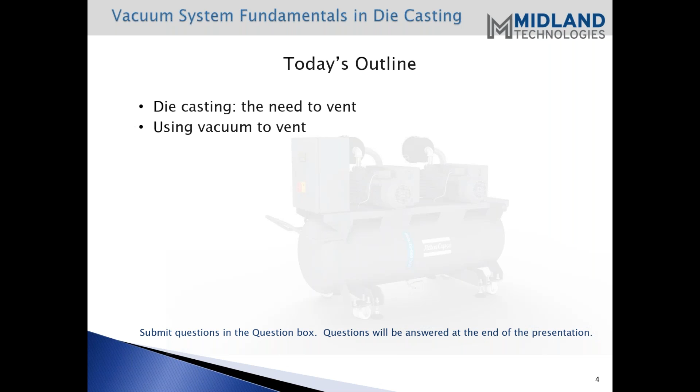So today's outline: we'll briefly go over some basics with die casting and the need to vent in die casting, and then also using vacuum to vent. We'll look at the fundamentals of a vacuum system, sizing the vacuum system, and the process during die casting and how the vacuum works. We'll be covering types of vacuum pumps, installation, monitoring, maintenance, and troubleshooting at the end. If you have any questions, submit them in the question box or comment box, and we'll answer them at the end of the presentation.

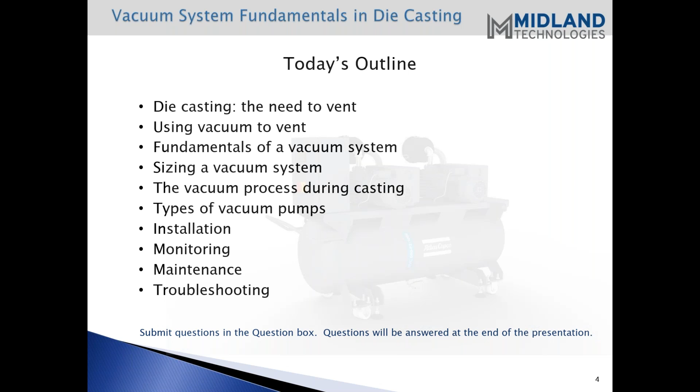Porosity is present in all die castings. If you've dealt with die castings at all, you know the air present in the casting - we term it porosity - and it's detrimental to the part. That's usually present in the shot sleeve, in the case of cold chamber, the runner's gate, and cavities, along with gases formed that end up in the casting when we shoot metal into the part. There's also release agent and/or tip lube in the cavity, and if it's not totally removed, we end up with porosity caused by that. So that requires us to have some means of evacuating that cavity, which is what we're going to discuss today.

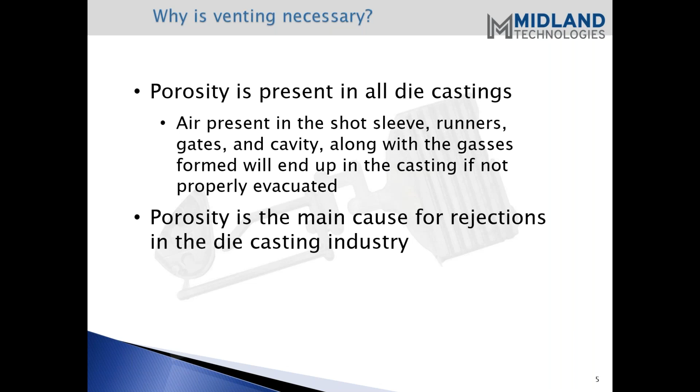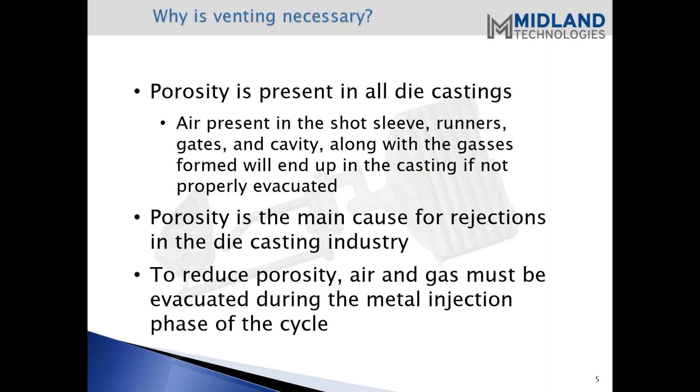Porosity is the main cause for rejection in die casting - I think everyone knows that. So we want to reduce porosity. The air and gas must be evacuated during the metal injection phase of the cycle, because we can't do it after that. We've talked about this in previous webinars - you're always going to have some porosity, but the key is to minimize it as much as possible. So why use vacuum?

We want this in cases where we have requirements of low porosity levels, for parts that are sensitive pressure tight vessels and structural members. Along with that is cosmetic features, and if we evacuate and get the metal in there quickly with reduced resistance, it also helps in producing thin wall castings.

It can assist with poor fill castings. We know thin walls, ribs, sharp corners, and standing posts pose their problems, and this alleviates some of those problems in those areas. High casting yields - we want to accomplish that, since downtime in the press is critical. So yield is everything in my mind.

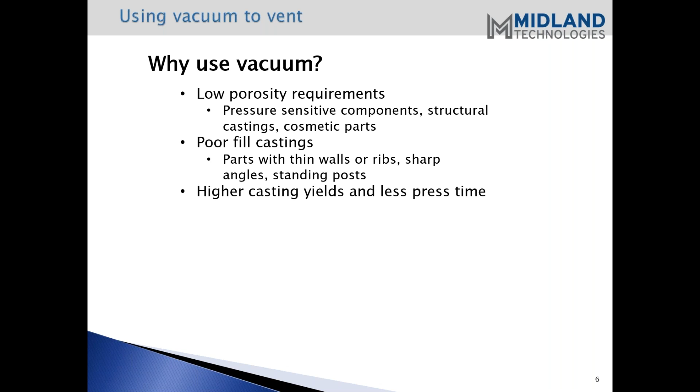You can make a lot of castings quickly, and I've seen that done over the years, but you probably want to make good ones. Yield is the key.

We've got here a slide with some pictures of Midland vacuum valveless vacuum blocks. No moving parts, as we note, and they're relatively easy to maintain if you design the system and hook them up properly installation-wise. The other advantage we have is reclaiming the metal. With conventional vents, we're unable to reclaim that thin flash. With a vacuum system, we can claim the majority of the metal.

And I think we'll be kind of emphasizing using the valveless vacuum block in the presentation, as we'll see.

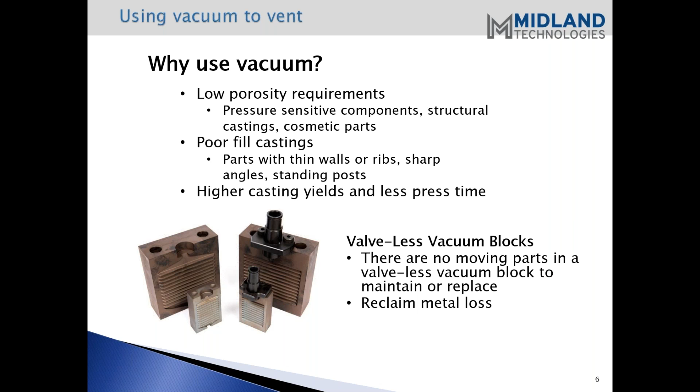So fundamentals of vacuum. The first thing we'd like to cover is the vacuum unit. Everybody's probably familiar with inches of mercury, a very common way to measure vacuum, originally developed by Evangelista Torricelli back in 1643 during his work on the original barometer.

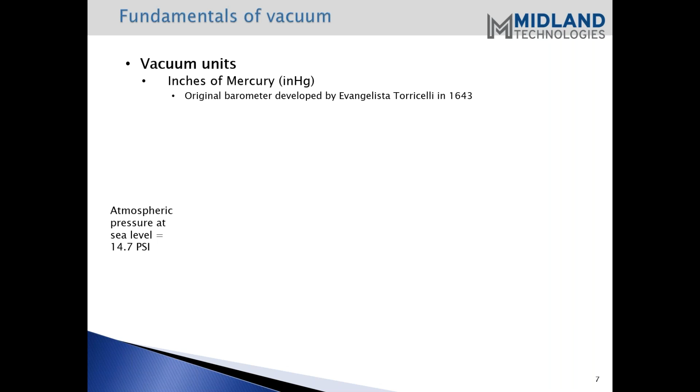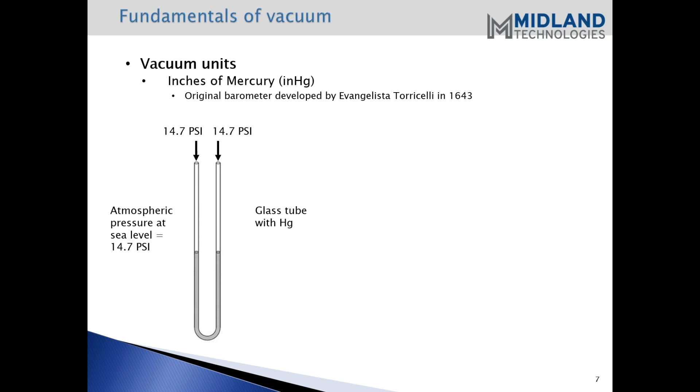If we took one end and attached a vacuum pump to it, removing all the air on that one end, with the 14.7 psi coming down on the opposite end, the mercury will start to rise, and it will rise to a maximum level of 29.92 inches. That's where that number comes from - the maximum value you can have for vacuum, and that's true throughout the whole world. You can't pull any more vacuum.

It's unlike compressed air, where you have a compressor that can build up more air as you go through. With vacuum, you reach 29.92 inches and that is it. So that's what we consider the maximum vacuum level - some people refer to it as perfect vacuum.

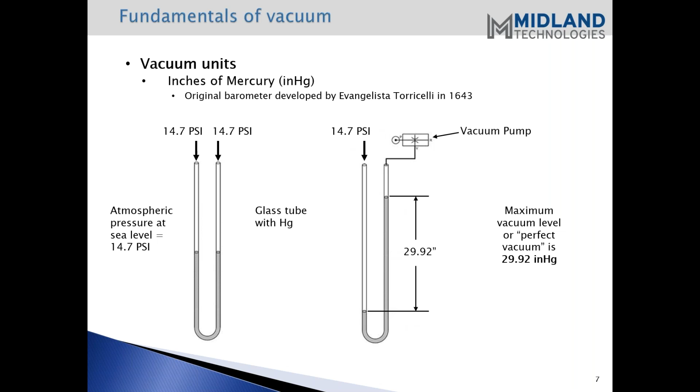The methods of measuring inches of mercury - a common one is the mercury gauge. Here on this slide it shows a standard gauge where 0 is atmospheric pressure, there's no vacuum, and 29.92 inches of mercury is your maximum vacuum.

There's also what they call mercury absolute, which is the inverse of the gauge pressure, whereas 29.92 inches of mercury is atmospheric pressure, and 0 inches is the maximum vacuum. You don't see many absolute gauges out there, but it is used in theoretical work, formulas and such.

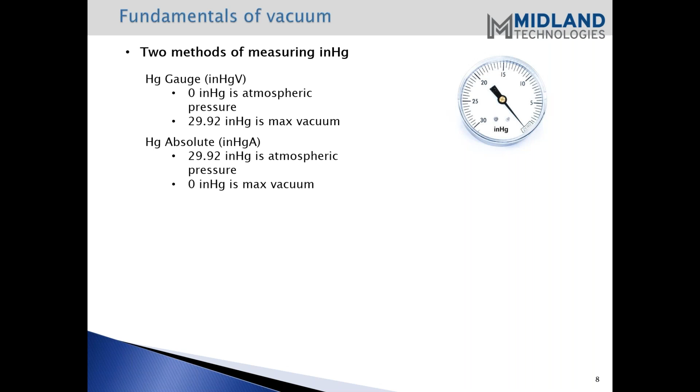Some of the other popular units are also absolute. First is torr, named for Torricelli, which is basically 1 millimeter of mercury. So if you have 29.92 inches of mercury and multiply it by the conversion factor of 25.4, 760 torr is the atmospheric pressure, and this gauge here shows that.

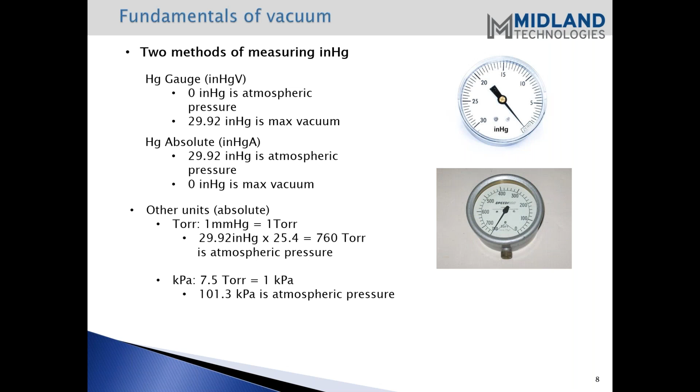So here's a gauge that does use torr for absolute pressure, and 760 is basically no vacuum at this point. Another popular unit is kilopascal, and 101.3 kilopascal is atmospheric pressure.

So what is the vacuum level needed for die casting? Very good question - that's the top question. It's very dependent on the volume of the casting and the speed of injection, and it can vary from one machine to another, one plant to another. What we have found is somewhere between 18 inches of mercury to 25 inches of mercury, you get a good casting from that.

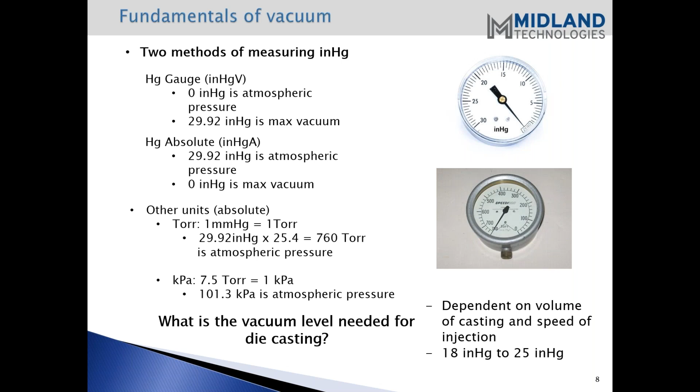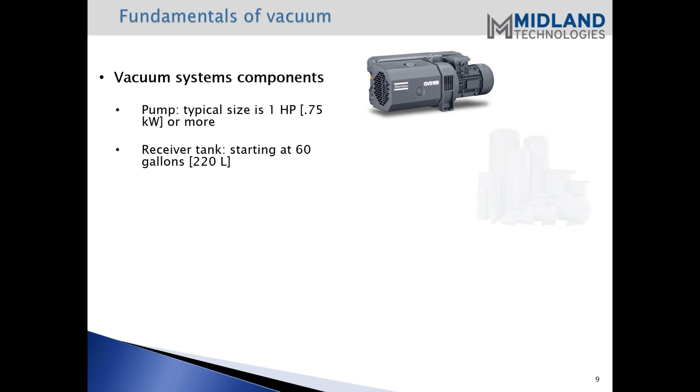So vacuum system components - a vacuum system consists of a pump, typically starting about 1 horsepower, or larger pumps as well, and a receiver tank starting around 60 gallons, which is what's typically seen in the industry. Here you see in the little picture horizontal tanks, and then you also have vertical tanks - each one's just fine.

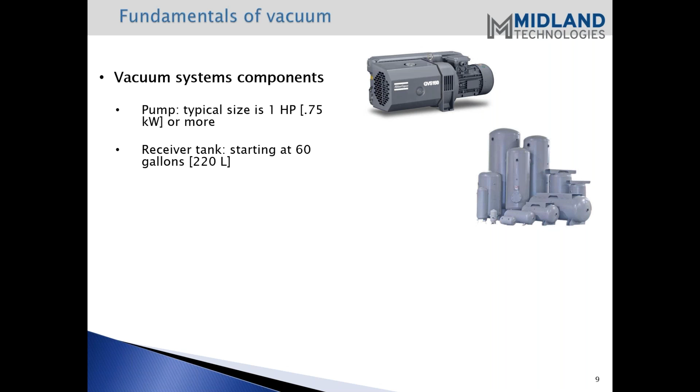So if you have a valve open or a leak or something, you don't want to do that. That'll kind of heat up the pump. But a standard closed system that's open and closed at certain times works just fine with the manual system. Have it on all day.

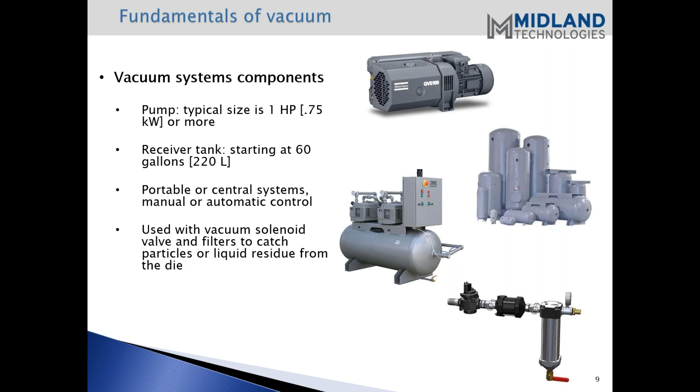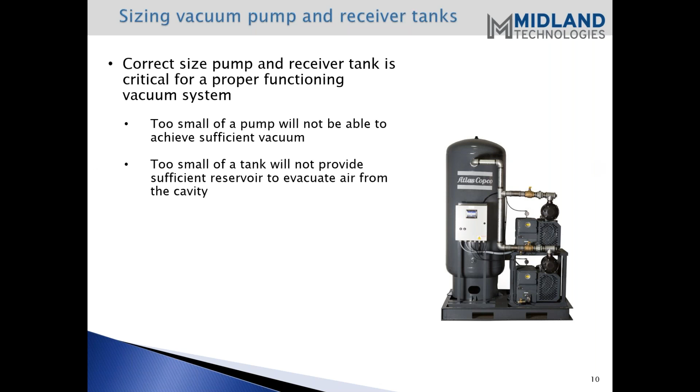So the correct size pump and receiver tank is critical for proper functioning. Too small of a pump, you won't be able to achieve sufficient vacuum. Too small of a receiver, you won't have sufficient area to evacuate the air from the cavity.

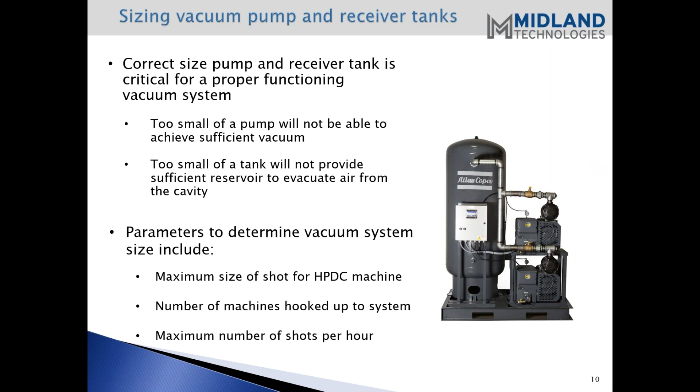So the parameters to determine your vacuum system size include the maximum size of the shot for your die-cast machine, the number of machines you're going to hook up to the system, and the maximum number of shots per hour. So what you want to do is design it for the maximum situation scenario that you might have, so any smaller items, a smaller situation will work fine.

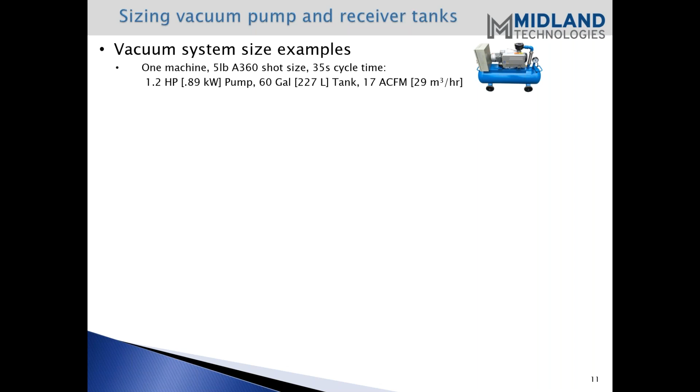So some size examples here. Let's say you have one machine, 5-pound shot size, 35-second cycle time. A 1.2 horsepower, 60-gallon tank would be sufficient with a 17 actual CFM. Now on different manufacturers, it might vary - it might be 1 horsepower, it might be 1.5 - but that would be sufficient size.

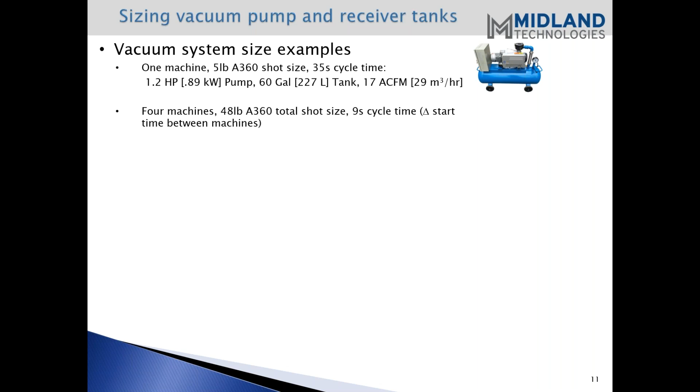Let's say you have a different scenario - 4 machines with 48 pounds total shot size and a 9-second cycle time, basically the delta start time between machines. In that case, a 3 horsepower, 120-gallon tank would be sufficient as well. And these numbers also include a safety factor. You want to make sure that you have a good safety factor in your calculations, so you have a large enough system.

The one thing too is that having a large system is just fine. So if you have a large system, but the next setup might be a small shot size and such, that doesn't matter. You want to make sure you have a large enough system for the maximum shot size and cycle time in your situation. Having too small of a pump, that can be an issue, and that's what you want to try to avoid.

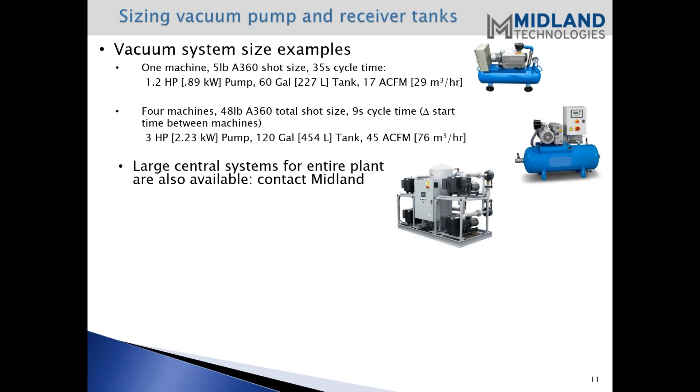So large central systems are available, of course, and if you have a situation like that for your application, you can contact Midland, and we can help you with those cases. So if you're not sure what size you need, we also have a vacuum pump sizing form on our website, and you can click on that form, fill it out, send it to us, and we'll help you determine the right size again for your application.

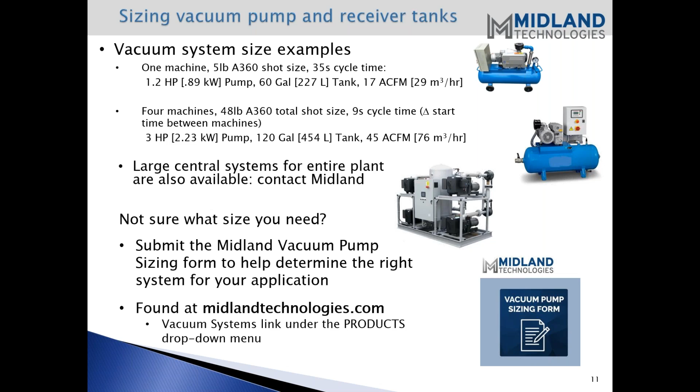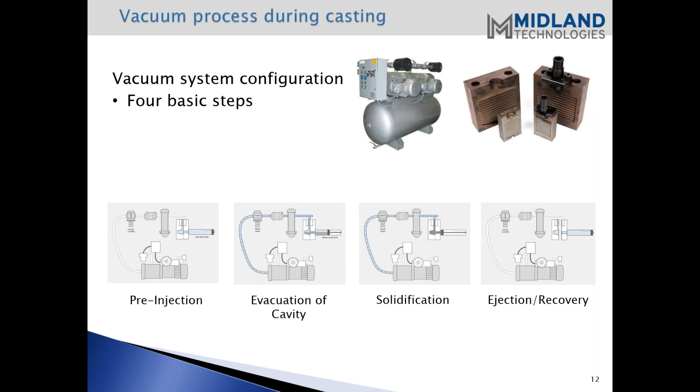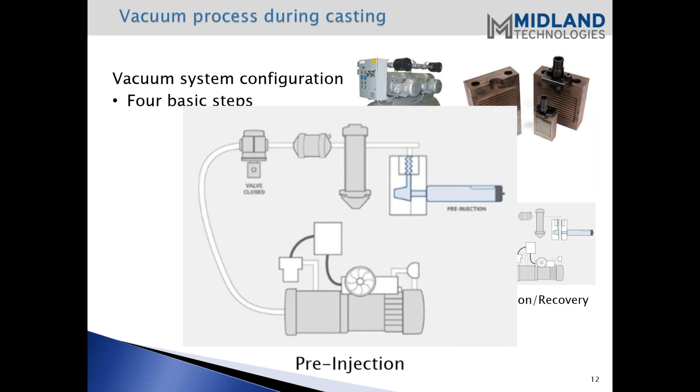So the vacuum process during casting - there are basically 4 basic steps. Here this diagram shows the pump system with the solenoid valve, media filter, knockdown filter, and you see a die here with the sleeve next to it, and the plunger in that sleeve is before the pour hole. So this is before metal is introduced.

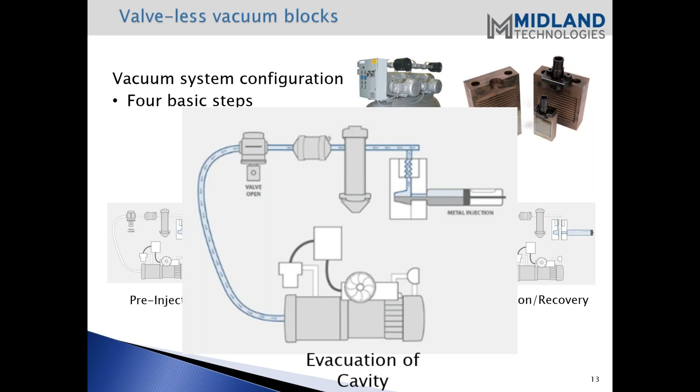Once metal is poured in and the plunger goes past the pour hole, that's when vacuum can be turned on. And the valve is open and it's drawing air as the die is being filled.

Once the die is filled and you pass the fast shot speed, you start to get into solidification. At that point, the vacuum with a valveless vacuum block can still be turned on. You don't have to shut it off. There's no metal that's triggering the valve to shut the vacuum off. Vacuum can be stayed on all the way through. In fact, it can be stayed on until you open up the die. And that's kind of a nice advantage of having that. It is an advantage. Yep.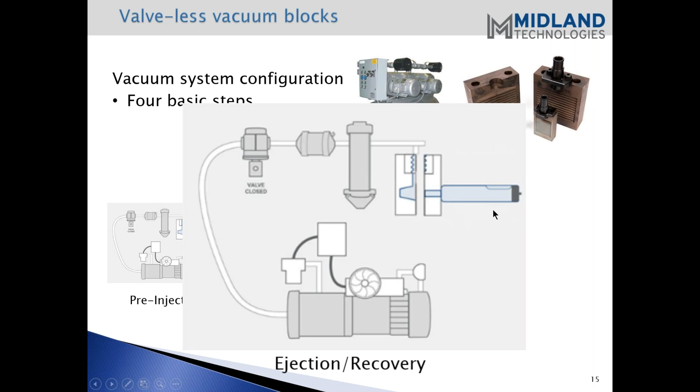All right, perfect. So let's talk a little bit about vacuum pumps. There are many different types of vacuum pumps manufactured. And obviously, as you guys mentioned, there's different levels of vacuum, and the type of pump will usually depend on the level of vacuum.

So there are rough vacuum pumps, there are high vacuum pumps, there are ultra high vacuum pumps, and the technologies are obviously different. For casting applications, the levels of vacuum in which the application usually takes place are what we would consider the rough vacuum range, which is anywhere in between atmosphere and more than 1 torr.

So the rough vacuum range has a big advantage in that it requires some of the less complex types of technologies out there, which means that there are pumps that do not require very special materials or very special machining and manufacturing processes.

So what I want to talk a little bit about in the next couple of slides is at least the most common types of machines that are used for casting processes and how they work, what kind of advantages and what kind of disadvantages they have.

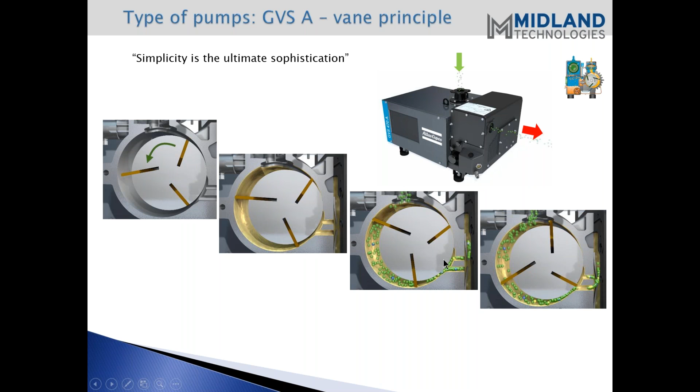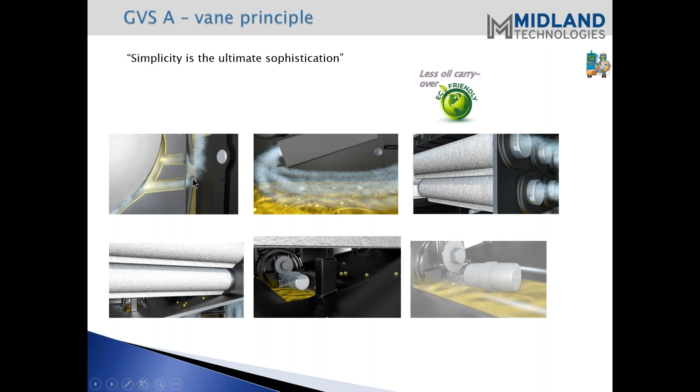Once you compress, it goes over to the exhaust port where there's a valve that prevents backstreaming. Then we go to the next part of the process, and that exhausted air and gases that are coming from the process at atmospheric pressure, a little bit higher than atmospheric pressure, they open the exhaust valve, and then they go through a little bit of a tortuous path in order for you to separate the oil from the gases and recover the oil that's being used to seal the pump.

So that mixture of oil and exhaust gases will go through a few baffles. It will go back to the oil reservoir, and then it will go through exhaust filters that look like paint rollers. These exhaust filters operate as coalescing filters, so all the small droplets of oil start accumulating, they coalesce, they drop down, and they accumulate in a small reservoir that has a float valve inside of the pump.

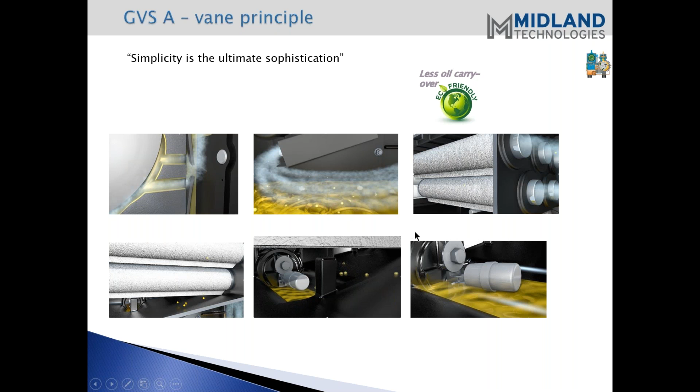Once that float valve is actuated, because there's enough oil accumulating there, it would just open and allow this oil to go back into the oil reservoir. So even though it's an oil seal pump, the amount of oil that gets exhausted is very small.

So one of the few things to keep in mind is it's a very simple type of machine. There's only one rotor, there's only a few moving parts. So that's definitely an advantage.

It also has gas ballast capability, so you can pump a decent amount of condensable through the pump without any kind of internal condensation in the unit.

Because of the oil lubrication and because of the design itself, the noise levels are relatively low, or some of the lowest within all vacuum pumps that operate in this range.

There's also some maintenance involved, which is something that could be considered a disadvantage. Just because you have oil in there, you're going to have to do oil changes with certain frequency, and because you have wear components, obviously there's vanes that are rubbing against the housing.

These vanes are usually made of composite material, so the vanes generate dust. They also mix with the oil and any kind of dust or particulate that comes from the process that's not filtered out, and then that could end up in the oil.

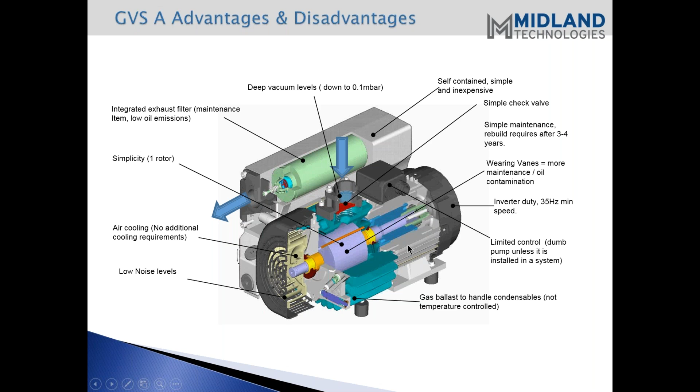So there's other types of pumps that are used for this kind of application as well, and one of them is the claw pump. A claw pump is also a positive displacement type pump, just like the lubricated vane, but it has an advantage, and that is that it's a completely dry unit.

So these pumps, they can only reach around 28 inches of mercury, 28.5 inches of mercury for the smaller sizes, and the bigger the pump gets, the hotter it gets with less pressure differential, so they tend to reach levels of vacuum that are not as deep. So they usually operate between, let's say, 25 and 28.5 inches of mercury, depending on the size.

You have your inlet port on the top, exhaust port on the end plate, and the claws are just separated. There's no oil, there's nothing in there. It's only just small clearances in between the mechanical components, the housing, the claws, and the end plates.

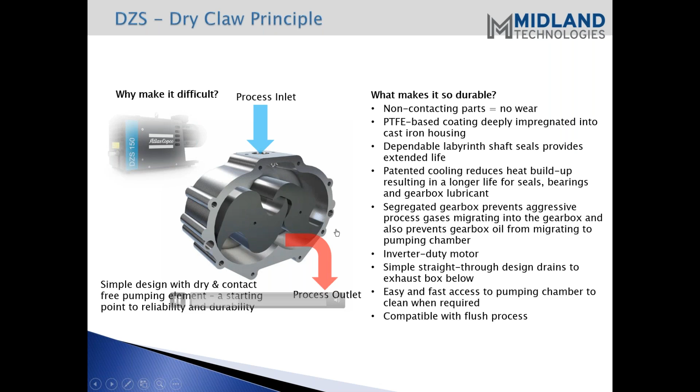And this is kind of like what the pump looks like when it's completely assembled. So those claws that we just saw are in here in the pumping element, and those claws are actually timed so that they don't hit each other by gears that are located in the gearbox.

And the gearbox is going to have oil, but again, that oil is going to be minimum. It's only roughly a quart of oil, regardless of the size of pump that you're looking at. So you have a dry unit with very small oil capacities that need to be exchanged. That means maintenance on these types of pumps is practically non-existent.

Let's say once a year or so, it's a good idea to change the oil. Obviously, changing filters is something that needs to be done more frequently. But apart from that, there's no wear components, and because there's no wear components, the only thing that eventually wears out is the bearings that support the rotors. Usually with normal 24/7 operation, as long as the oil is in good condition, you can get away with only having to rebuild these pumps after 6 or 7 years, with no issues whatsoever.

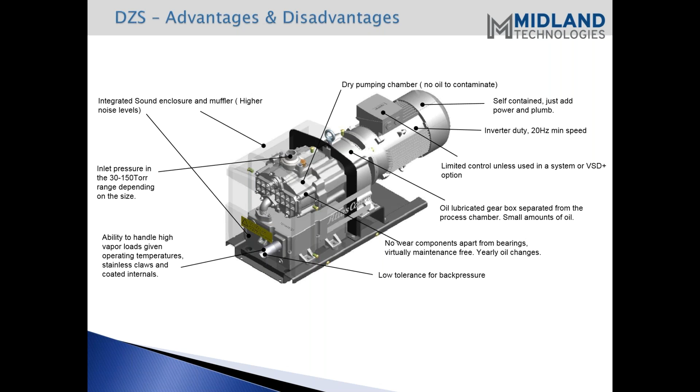Then there's another type of pump that's mostly used for centralization cases. So if you have several die casting machines and you want to connect everything centralized to one machine, this is the type of machine that we would often recommend, which is a lubricated screw unit.

And the advantage of this is you get the best of the lubricated vane technology with the best of the dry claw technology, and eliminate a lot of the disadvantages of both. The idea is that, yes, it is also a lubricated machine, so it does require maintenance, but because it doesn't have any contacting components, the maintenance intervals can be extended considerably.

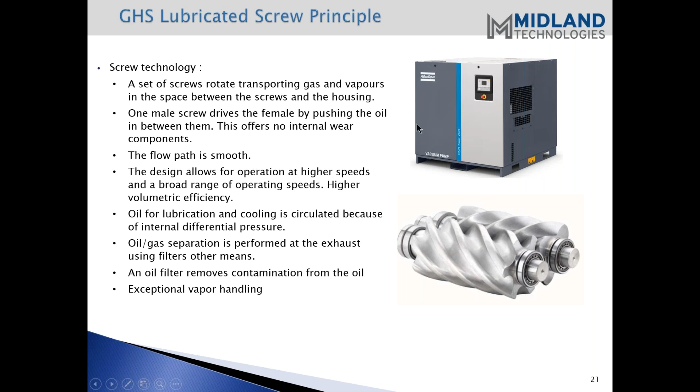So doing oil changes will only be required in most cases once a year, and rebuilding these pumps can be done after 10 years, for example. These things are technically a tank, and apart from that, they are also inside an enclosure, which makes them a complete system. As I'm going to show you next, this is what's inside of one of these boxes.

So it's not only the pump, but it also includes a modulating inlet valve, an inlet filter, the oil separator, a cooling fan, a VFD inverter duty motor, a drive, and an HMI that's color, so you can set pressures or program it. It also includes a drip leg, so everything that you need in a central vacuum system is actually all included in one box.

So you can put one or two of these units in a corner somewhere, and these units can be set the same way that a central vacuum system with vane pumps or claw pumps can be set to meet a specific pressure. These can do the exact same thing, but right out of the box. It's a standard item that does that without any maintenance disadvantages.

It also has a 10 hertz minimum speed, so the range of turn down is a lot larger, which means there's a lot of savings in terms of power consumption. And again, the rest of it has to do with the reliability I already told you guys about.

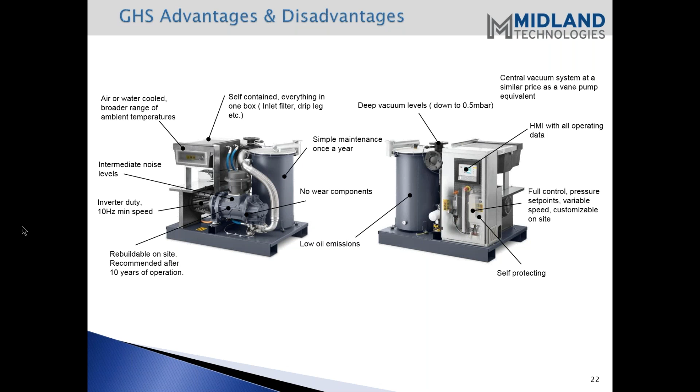So next we'll be looking at location. There are some basic parameters you want to follow: near your electrical, near your die cast machine, or in the middle of the plant floor next to an outside wall. These are all common locations that people will put the vacuum systems. Separate room, or even on a platform too. You basically want to make sure you have accessibility to the pump for your maintenance.

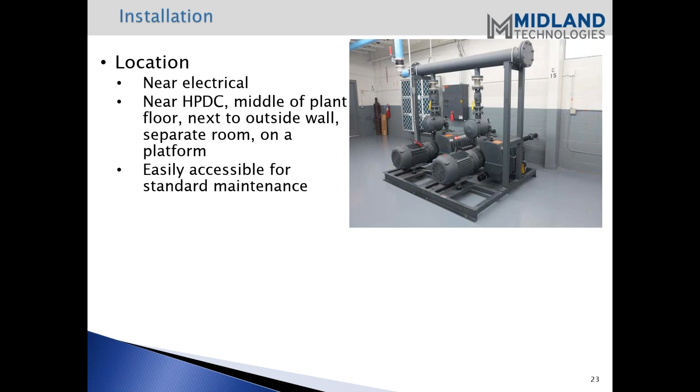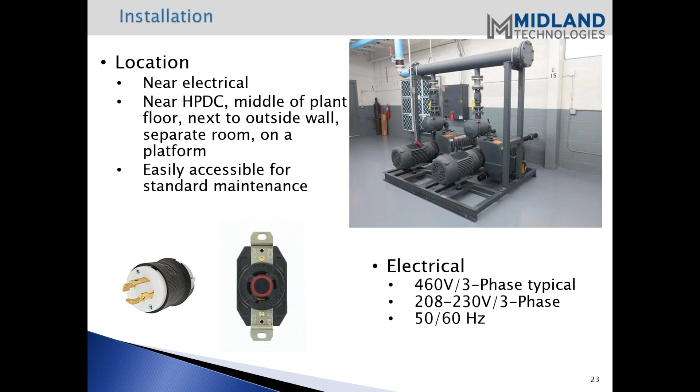Electrical, typical electrical is 460 three-phase. Pumps can also be 208 to 230 three-phase, which is common as well. 50 or 60 hertz depending on U.S. or Europe.

So next we'll look at the plumbing. Schedule 40 piping works just fine. We recommend a minimum diameter of 1.5 inch. PVC has worked fine as well, or metal piping, depending on what material you have available. PVC is a little less expensive, but metal piping—galvanized steel, carbon steel, iron steel—there are a lot of different types of metal piping you can use for a vacuum system.

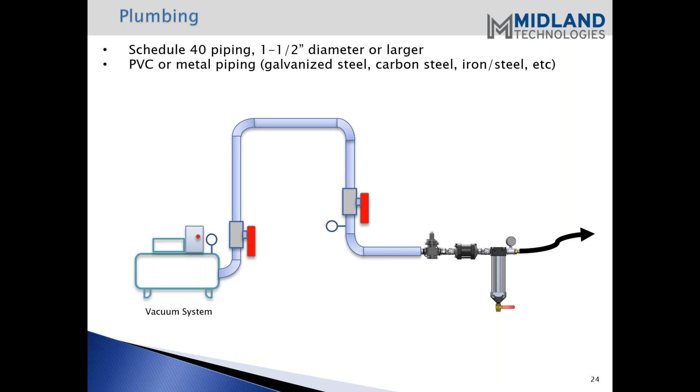Hose is just fine, typically used for shorter distances, but it must be vacuum rated. You have to have a reinforced hose or else it's going to collapse on you. I came across a situation where someone had a small desktop pump doing experiments in the lab and they used a standard pneumatic pressure hose—that doesn't work. You need to make sure that if you're using a hose, it has to be vacuum rated, and typically they're reinforced with metal strands.

So with the plumbing, we recommend using elbows with a larger radius. Try to avoid sharp turns, 90-degree turns, and such.

Valves are recommended throughout your system—a valve near the vacuum pump, a valve right before your machine. If you have to do any type of maintenance, you can turn off certain sections. You also add a gauge by the valve so you can monitor your vacuum and make sure you have vacuum in that area, or check if you have vacuum at that point during maintenance.

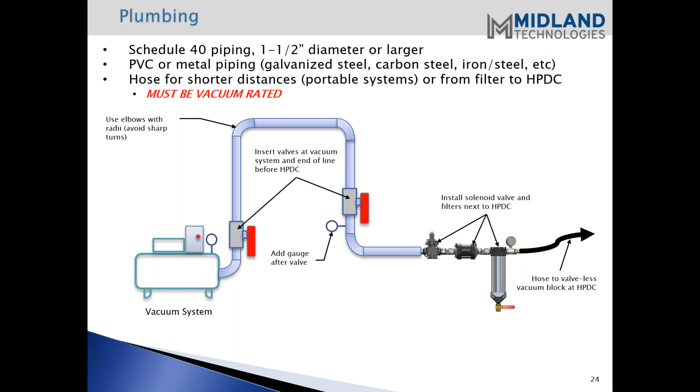If you need to do maintenance, you can bleed the system by turning off your valve here, and then opening the valve on, for instance, the Midland hookup kit's knockdown filter. There's a manual switch on the solenoid we provide that you can actuate, and that'll bleed any vacuum in the system after the valve, so you can take things apart or add piping wherever needed.

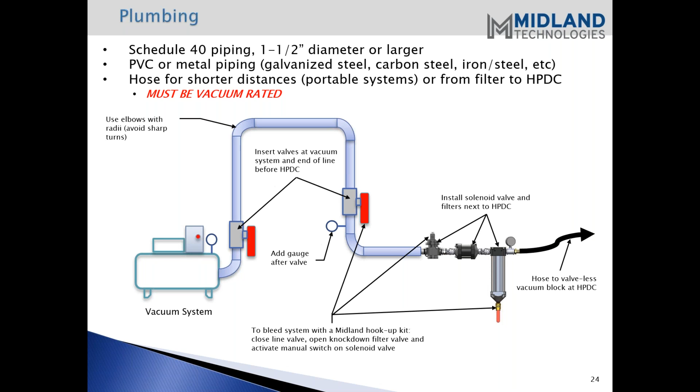So, monitoring. A good process is to monitor your vacuum using gauges. But one of the things we've developed here at Midland is what we call VacAlert, our new vacuum monitoring system. VacAlert uses hardware and software combined with transducers to monitor your system, and it can detect real-time vacuum levels in the die cavity and throughout the filters.

When your vacuum goes below a desired level, we have ways to set up certain warnings or cautions to the operator, and it will alert you when those levels are hit.

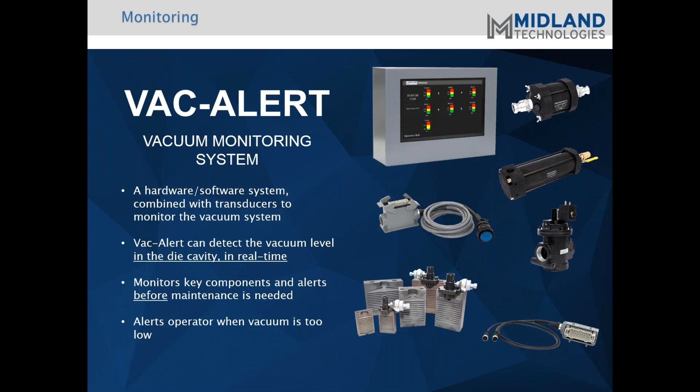It uses a dashboard display that shows the different levels of the different sensors throughout your system—at the source of the pump, at the filters, on the valveless vacuum block, and also what we call an iBlock, which is placed in your die with a runner that comes up to that iBlock to monitor the level within that area.

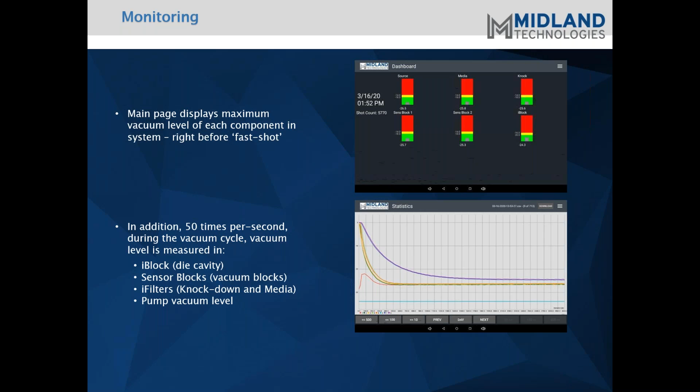Here we show a graph that shows the level of vacuum once it's turned on. The vacuum turns on, you have slow shot, then you get to a point where you have fast shot, and it can monitor your vacuum level throughout the whole shot.

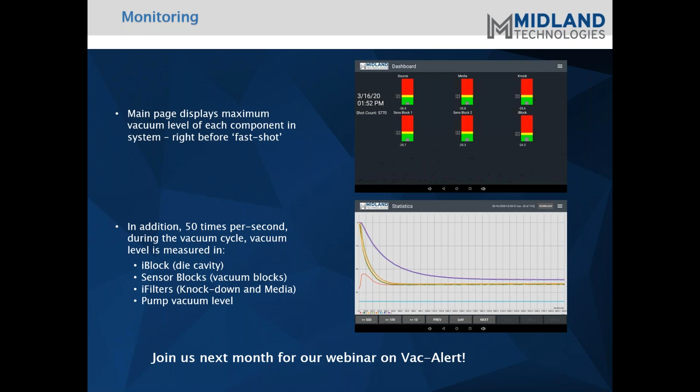Next month you can join us for our webinar on VacAlert—our next webinar series this coming September will be about VacAlert. Then we can talk about maintenance, and Antonio, if you can go over this slide here.

Maintenance is a very important topic, and it can vary considerably depending on the type of pump, the process, and also the way the pump is being operated. The values shown here are based on standard clean applications where there's good filtration, and they're used almost as a reference point, a very realistic reference point for most non-aggressive processes.

Lubricated screw machines require oil changes every 8,000 operating hours or every year. Lubricated vane pumps, the oil for the exact same application lasts less time, roughly around 4,000 to 8,000 hours, but it depends on how contaminated the process is. Claw pumps, our literature in some cases shows oil changes required every 20,000 hours, but it's a good idea to change the oil every year or so, especially considering the small amount of oil that's actually required.

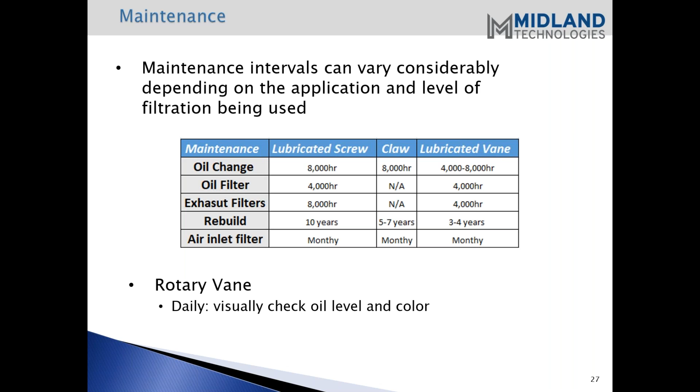The other thing we have with rotary vanes is to visually check the oil level and color. There's a gauge on the pump itself, and when you do change the oil, synthetic oil is recommended.

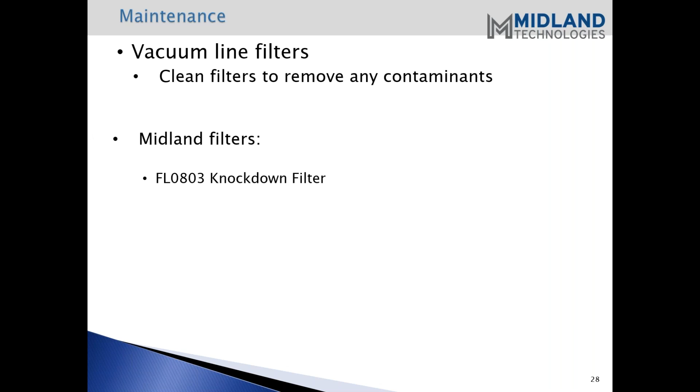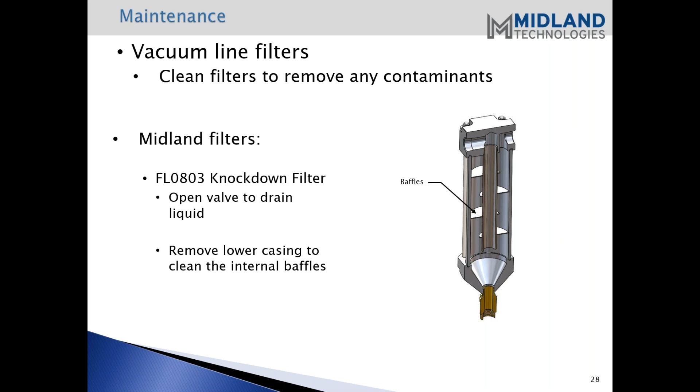Then we'll go on to maintenance with the filters — you need to clean the filters to remove any contaminants. Whether you use our filters or any other type, you want to make sure you monitor and clean them. Our knockdown filter comes with a valve you can open to drain any liquid, and you can also remove the lower casing to clean the internal baffles — you'll find some buildup over time on those baffles.

With the media filter, you can open up the filter — we have a mesh, a disc, and some media elements that can also be replaced.

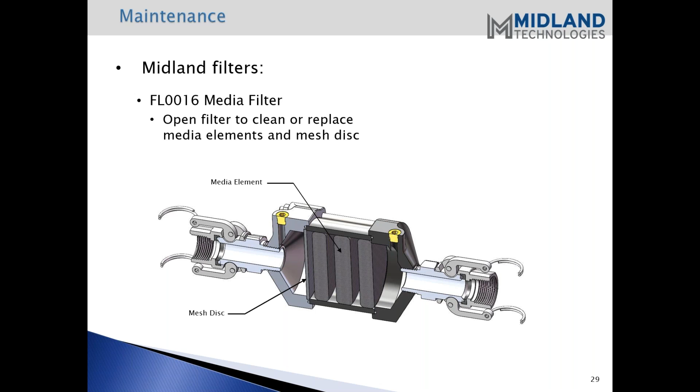So next we'll be talking about troubleshooting. If you have insufficient evacuation, what do you see? Some surface defects, and gas usually shows up. It'll show up on the surface of the part or internal, either one, but the surface is probably the most likely you'll see when you're running the part and just looking at it. You don't want to get to that point.

A possible cause is a pinched or clogged vacuum hose. You want to monitor your vacuum hose, take a look at it, and see if you need to replace it or remove the obstruction. Plugged filters, as we just talked about - regular cleaning of the filters is required.

The frequency of cleaning the filters could be just once a week. We have cases where they're cleaned each day. Perhaps you might have a set of filters off to the side, and between shifts you might replace the filters - take the old ones out, put them aside to get ready to clean, and replace them with new clean ones. And of course, you can open the drain on the knockdown filter and also replace the meshes inside the media filter.

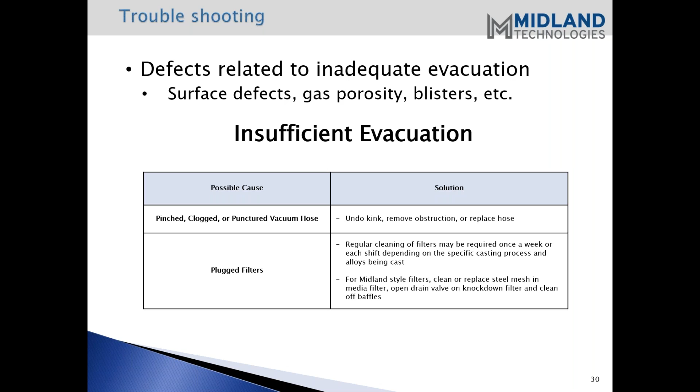Other causes for inadequate evacuation include low or no vacuum. This is where you can also check the vacuum level of the shot sleeve at the pour hole. There are several ways you can do that.

If there was a question, a lot of times you'd just lay a rag over the pour hole and turn the vacuum on. If you have vacuum, that should show - it would draw the shop towel down. That's just a very simple way, but of course you don't know what the level is.

Then there are some things you can do by adding gauges and sealing off that pour hole, then activating the vacuum to get a reading on what the vacuum level is right there at the pour hole, which is a good way to do it. You can do that in different manners. Of course, if you're plugged at that point and you're not getting any vacuum, then you move on.

You could have misalignment with the two halves - the blocks could be misaligned. You could have buildup in the block itself, and if you go back far enough, you can get into the filters too. That's where the vac alert comes in handy, because it can really pinpoint where you may have a problem.

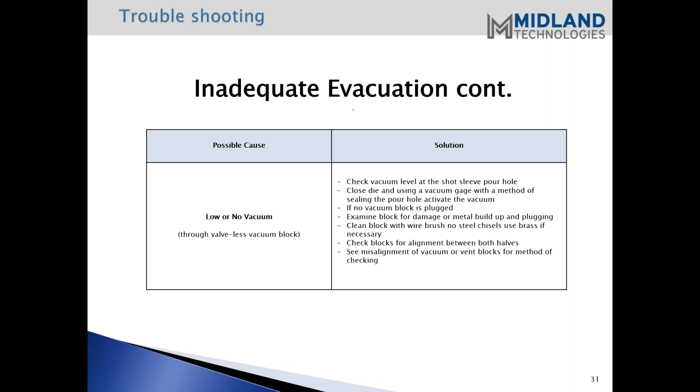Other concerns: failure to achieve expected vacuum level beyond the solenoid valve - a low vacuum level at the primary pump and tank. You want to make sure all the drains are closed, ensure there are no leaks at the junctions throughout your entire vacuum line, and check the oil level and oil quality.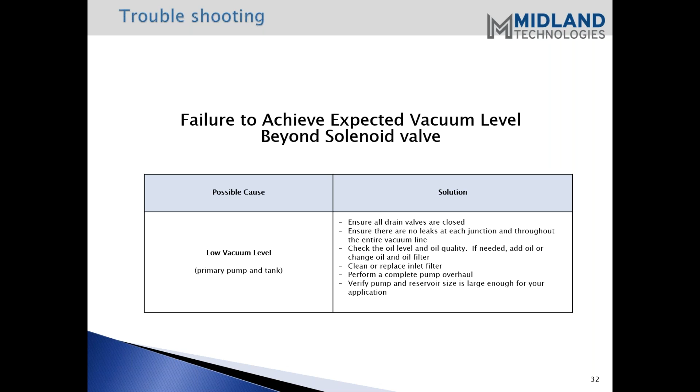Change the oil if needed. If the inlet filter is clogged, it's going to have a tough time drawing vacuum, and perhaps at that time it needs to complete a pump overhaul. Of course, you want to make sure you have an adequate size pump and reservoir for your application. Also watch for metal fines in the vacuum hose.

No filtering - well, you need to install filters. It's highly recommended. You're going to have some fines, no doubt. And if the filter is clogged, drain or clean the filters.

High metal velocity is another issue, so you want to take a look at your runner design and the process itself, and whether your shutoff is adequate. A lot of times, if you haven't installed that block properly, you can blow through it depending on the amount of flash. You can tell from that whether you have sufficient flash, and if you're flashing the block itself, you'll see that it'll pass right through.

The biggest cause we probably see is improper design of the runners from the cavity itself to the block. A lot of times they'll be misdesigned, and if they are, there's potential for blowing metal right through the block right away. Also, proper sizing of your vacuum, valveless vacuum block is important.

And so we've recommended the 90-degree turns, 5 90-degree turns in your runner design. You want to create some resistance as you're exhausting that end of your cavity. So it's the opposite of what you do at the inlet gate.

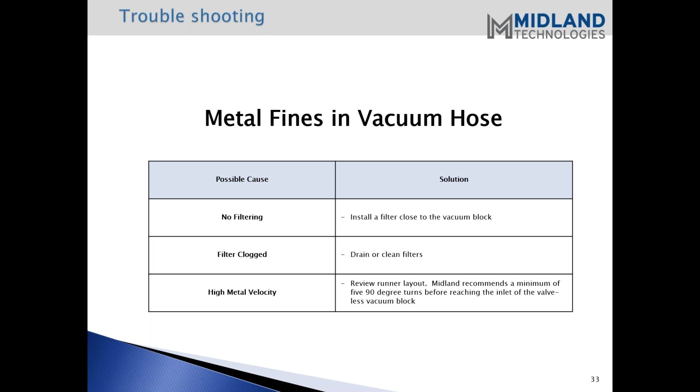The first question submitted was, you also need to know the volume of the plunger sleeve to determine the vacuum system. That's a good question. The plunger sleeve is critical when you determine the size of the valveless vacuum block. For the actual vacuum system in our form, we don't actually ask about that because we have a certain safety factor built in. We need to know your maximum shot size, but we also have a good safety factor built in. But it is critical with your shot sleeve for your blocks - whether you're using the vent block, the chill block, or the valveless vacuum block, that's important information to have.

What if you don't know the maximum shots per hour on the machine? Is that going to end up being a problem? Well, knowing the maximum shot will be able to determine the size of the system for your maximum scenario - your maximum size shot, your fastest cycle time.